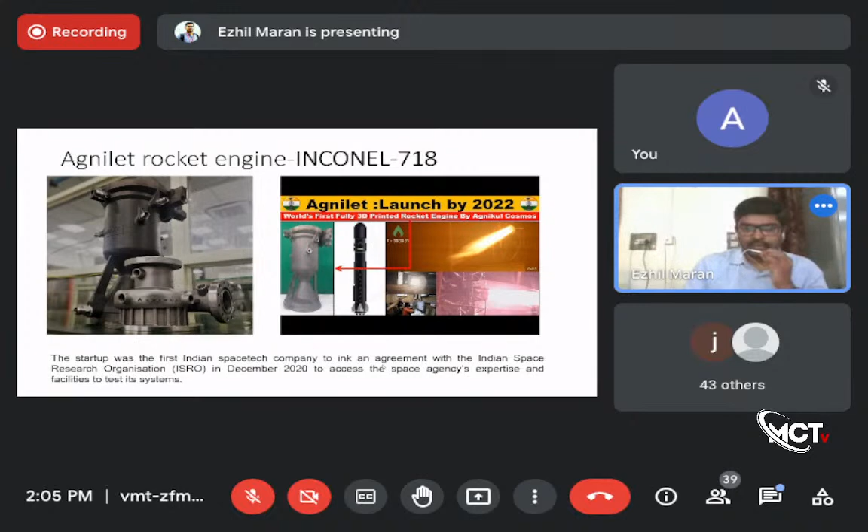So that Agnikul company has raised a total funding of around 35 million US dollars from various agencies. Specifically, Anand Mahindra of Mahindra and Mahindra has also given some funding to develop such a single piece rocket engine. So similar to this startup Agnikul, many such startup companies are coming forward to develop products specifically by using the additive manufacturing process. Around 53 space tech startups in India have collectively raised funding of $220 million.

Because if any one person talks about additive and tries to invest, tries to build something by using additive manufacturing, many investors are coming forward to support, in terms of monetary support or ethical support, whatever it is. Many companies are now giving money to get a better, complex shaped product in additive manufacturing. That is the encouragement. So key goals of India's 3D printing policy are to establish India as a global hub for additive manufacturing, and to develop and safeguard India's additive manufacturing intellectual property.

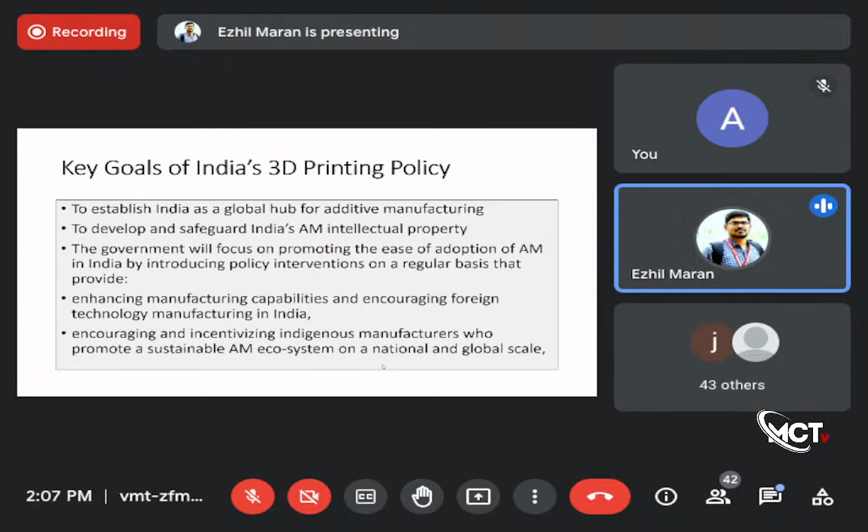Sorry, I'm getting some message. I'm not able to see the message. What exactly is it?

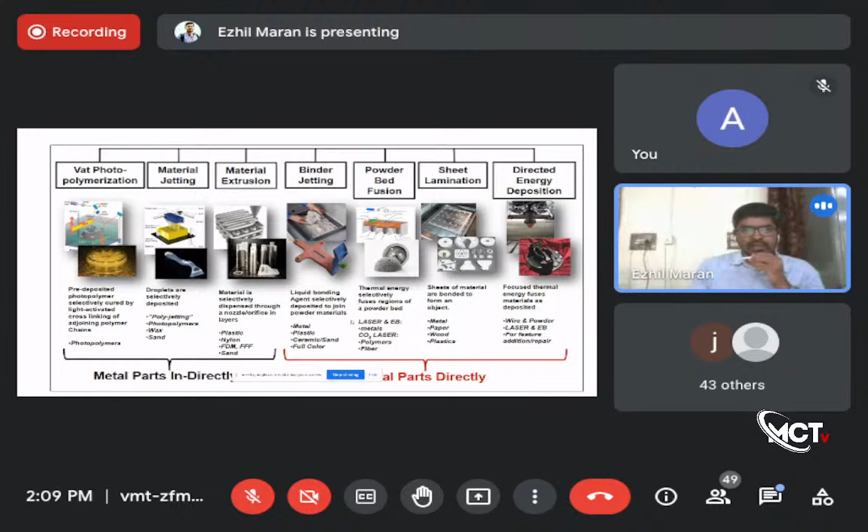Binder jetting is also used to make metals, but it is not covered in this topic. Vat photopolymerization is used to make plastic parts. Similarly, FDM is also used to make plastic parts. That process is not covered in this topic.

So for making metals, primarily two processes are very popular, as I said: powder bed fusion and directed energy deposition. Within powder bed fusion, there are a lot of types: selective laser sintering, which we call SLS, selective laser melting, direct metal laser sintering, and the second is electron beam source.

The first three, SLS, SLM, and DMLS, utilize a laser source. And the second one is electron beam source. You can use an electron beam to melt metallic powders. This process is suitable only for electrically conducting metals.

Selective laser sintering was introduced by the University of Texas at Austin, USA, in the 1980s. Gradually, many people started using it, and they got a patent as well. So others switched over to some other process. The Fraunhofer Institute in Germany, in 1995, because of this patent issue, didn't use selective laser sintering. They invented a new technique called selective laser melting.

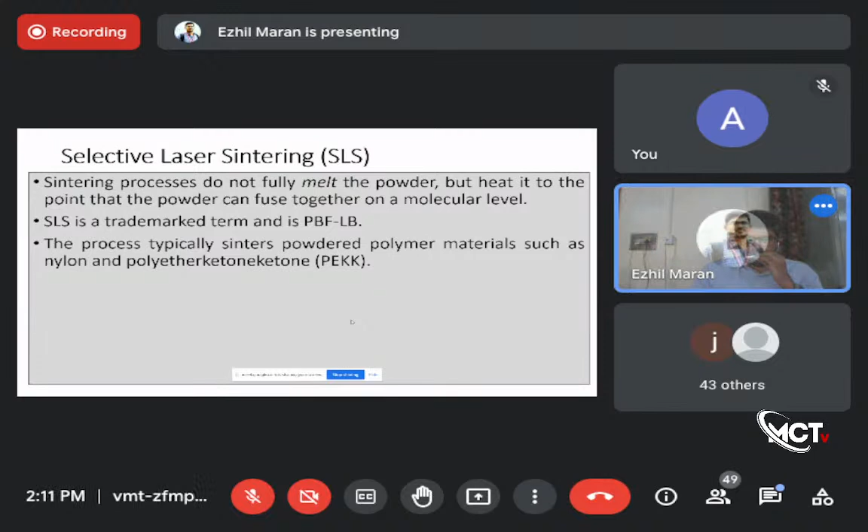But selective laser sintering and selective laser melting both work by almost the same mechanism. There's no drastic difference between SLS and SLM. Selective laser sintering, SLS, does not fully melt the powder, but heats it to a point where the powder can fuse. Only the outermost layer of the powder will be melted, and two powder particles will be fused together at a molecular level. That is called selective laser sintering.

In selective laser melting, the powders will be melted fully. Normally the laser energy is very high, so as to take the powder to melting point, and the fusion of two powder particles is possible. So full melting is possible in selective laser melting. But generally speaking, all the powders will undergo melting. Even if you say selective laser sintering, most of the time the powder will melt.

Sometimes some materials cannot be processed in a normal working atmosphere, so you have to give a separate working ambience. You have to supply argon gas, or use a vacuum atmosphere for certain materials if you want to stop the reactivity of the metallic powder with atmospheric gases. So that is also there.

And one more term is direct metal laser sintering. This is similar to SLS and SLM. This term was coined by EOS GmbH, a German additive manufacturing company. Instead of calling this process SLM or SLS, they coined a new term, DMLS, direct metal laser sintering.

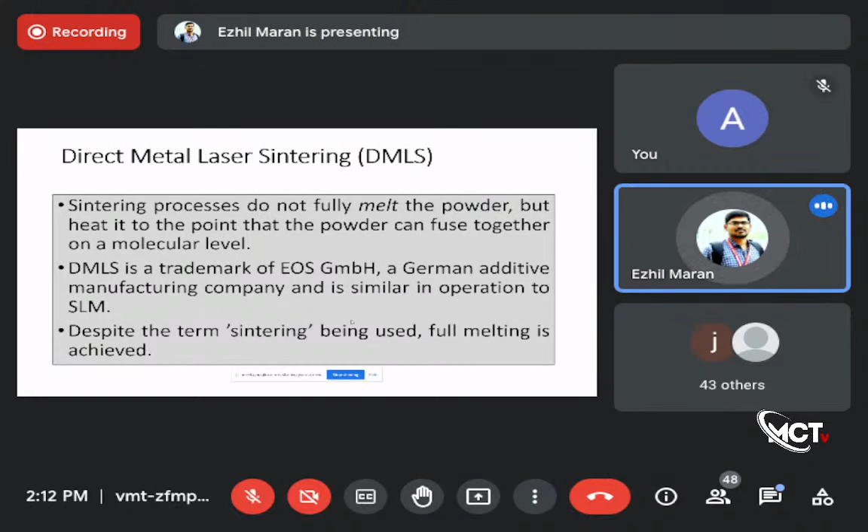But generally, what is SLS and what is SLM? When to use SLS, when to use SLM, and when to use DMLS, if you ask me: if you are working with some sort of alloy, you can call the process SLS or DMLS. If you are working with a pure metal, such as titanium or pure nickel, you have to use SLM, selective laser melting.

Most of the time, we work with an alloy, isn't it? If you work with titanium, you are working with Ti64. If you want to work with nickel, you use Inconel 718. These kinds of materials are alloys. So the majority of the time we use SLS instead of SLM. Selective laser sintering is the widely accepted term.

So the challenges in additive manufacturing: there are a lot of challenges, technical capability, financial, design, IT integration. There are a lot of challenges in establishing additive manufacturing in the global market. Almost all the companies are facing these challenges. So I will explain challenges related to technical and financial design. Capability and IT integration are not covered in this presentation.

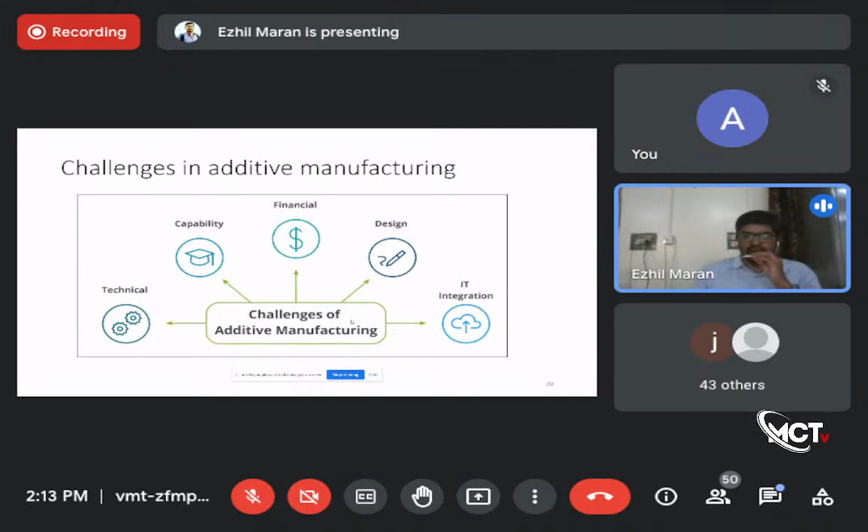Over the plate, the powder is selectively fused by using laser, or it may be an electron beam source also. Once the layer is coated, the powder bed is dropped down by one layer. The next layer is coated over the previously formed part surface by means of recoater plates, and a fresh layer is again fused by means of laser or electron beam. This is called powder bed fusion process.

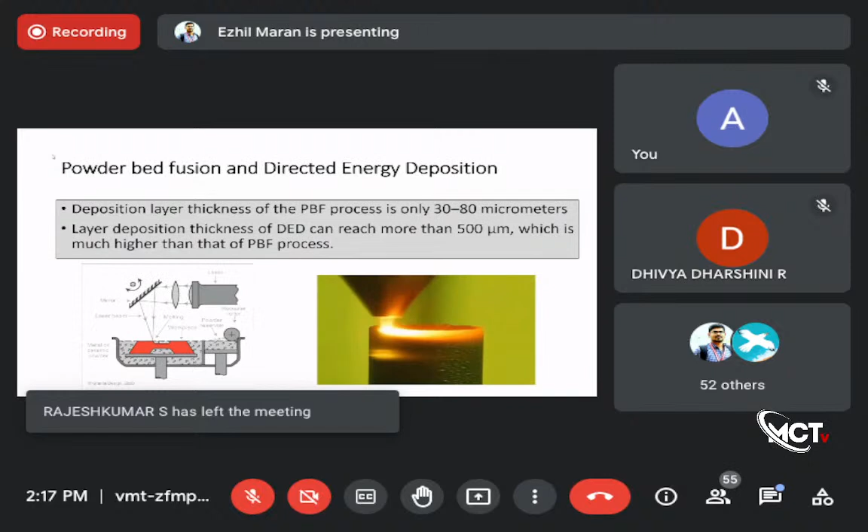The size of the part you are building depends upon the size of the chamber. The chamber may not be big enough to make a big product. So the first limitation of powder bed fusion is part size. But in directed energy deposition there is no such limitation. You can make a very big product in a short time. Deposition rate is very high in directed energy deposition.

Simply saying, directed energy deposition is primarily used for repair work. Suppose in a spur gear one or two teeth are broken; instead of the broken teeth you can deposit fresh material and make it a fresh gear instead of replacing it with another gear. You can make the teeth using directed energy deposition. That is the advantage of DED.

But DED has a lot of disadvantages in terms of accuracy. The product made by DED may not be accurate. Dimensional inaccuracies, that is the term used. And also part strength may not be as high as that of SLM.

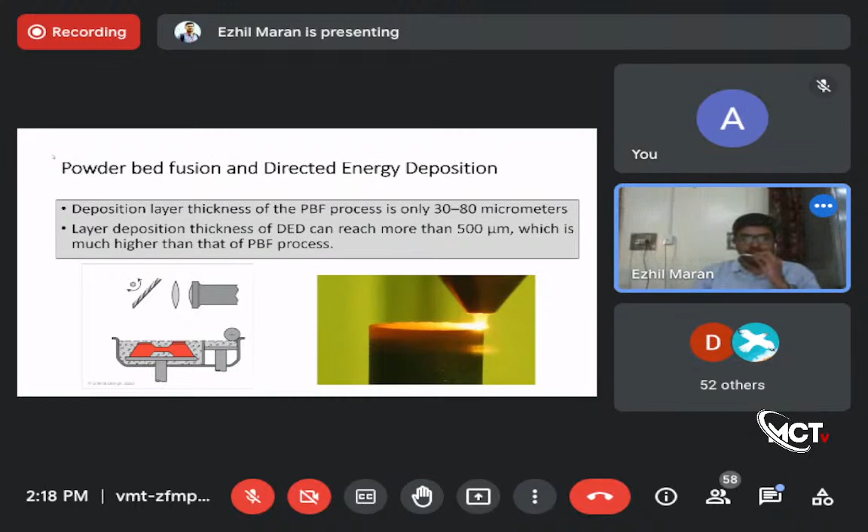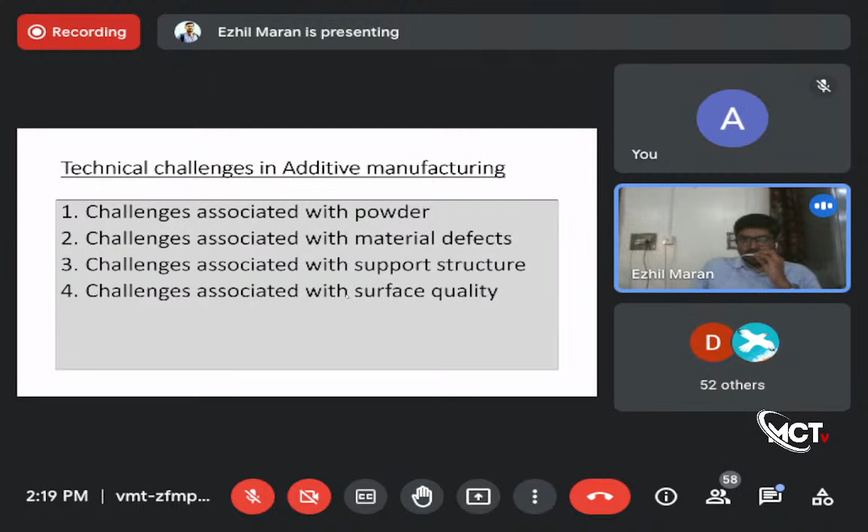So there are three design challenges: anisotropy, wall thickness, and print orientation. And the technical challenges I'm going to cover are challenges associated with powder, with material defects, with support structure, and with surface quality. So what is anisotropy?

Look at the picture. There are two parts printed in different orientations. The first part, a hollow cylinder, is printed vertically, and the second part is printed horizontally. Which one is preferable? Both these parts will be anisotropic. Anisotropic means the properties will be different in different directions.

In the first part, which is kept vertical, the strength is very low in the Z direction. If you apply load in the Z direction, the part will fail easily because this is a layer by layer deposition process and the layer to layer strength is very low. If you apply loads in that direction, the part will fail.

But if you focus more on the aesthetic look of the product, the first part is pretty good. It looks very good, isn't it? So if you don't worry about the strength, the first picture, which is printed vertically, is the correct option. That's the correct way to print.

In the second picture, the same hollow cylinder is printed horizontally. Here it can withstand the load if the load is applied along the axis of the hole, because the layers are printed in a direction perpendicular to the load acting direction. So the horizontally printed object certainly will have huge strength when compared to the first part.

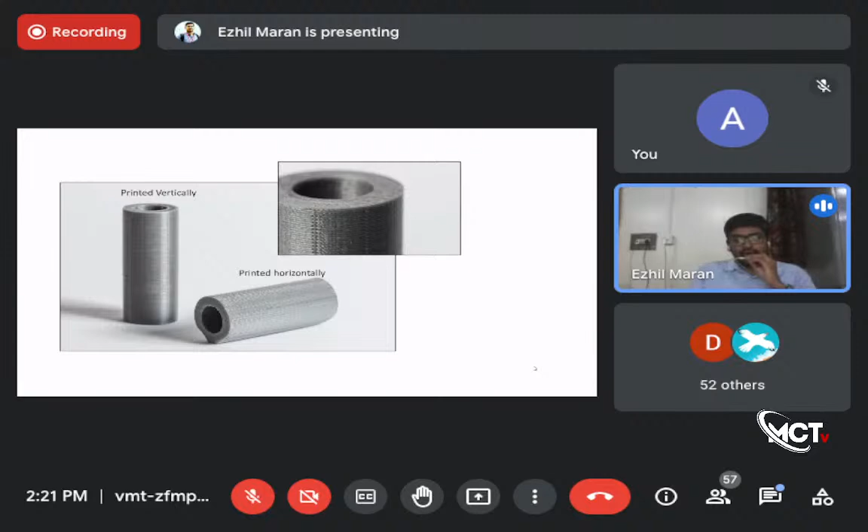So in both cases, the parts printed are not isotropic. Both are anisotropic. Strength is not uniform in all directions. So proper orientation is essential for printing a product. Whether you want an aesthetic look, strength, or to minimize the support structure, these are the parameters which decide which orientation is suitable for printing.

Look at the picture. Which is the best way to print for testing using a UTM, universal testing machine? After printing the shape, to use the UTM machine to test the tensile strength, which is the proper orientation? The object is kept at 0 degree, 30, 45, 60, 90.

So again, the printing direction depends upon the load acting. If you print an object at 0 and the load acting direction is vertical, that is a bad idea. You should not do that. The object which is kept flat, 90 degree, is the best way to print if the load acting direction is along the axis of this standard specimen. If you print it by keeping the object lying down, that's the best way to print.

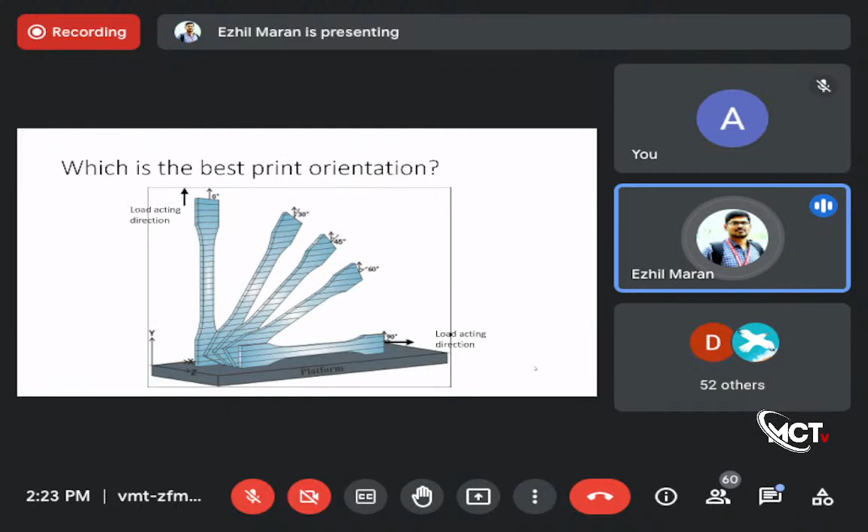If you print at 60 degree, 45 degree, and 30 degree, you need a lot of support structure. The first object is printed in the Z direction and the second object is printed in the XY direction. The force acting direction is horizontal. So what is the best way to print, the first one or the second one? Obviously, the second one will withstand. The first one certainly will not withstand a large amount of load.

A challenge for any manufacturer is the minimum size of hole that can be made in a material. You can make a small hole, say, for example, 100 micron, by using smaller drill bits. 100 micron drill bits are available in the market. You can make a small hole or small slot with the size of 100 micron. Even 15 micron is also possible. But for additive manufacturing machines, that's a little challenge.

The smallest hole that can be made by additive manufacturing depends upon the thickness of the material. In the first picture, the thickness of the material is 2 mm, and in that material you are going to make slots. In the second part, the thickness of the material is 4 mm, and gradually 6, 8, and 10 mm. 2, 4, 6, 8, 10 are the thicknesses of the material, and over that material some slots are made.

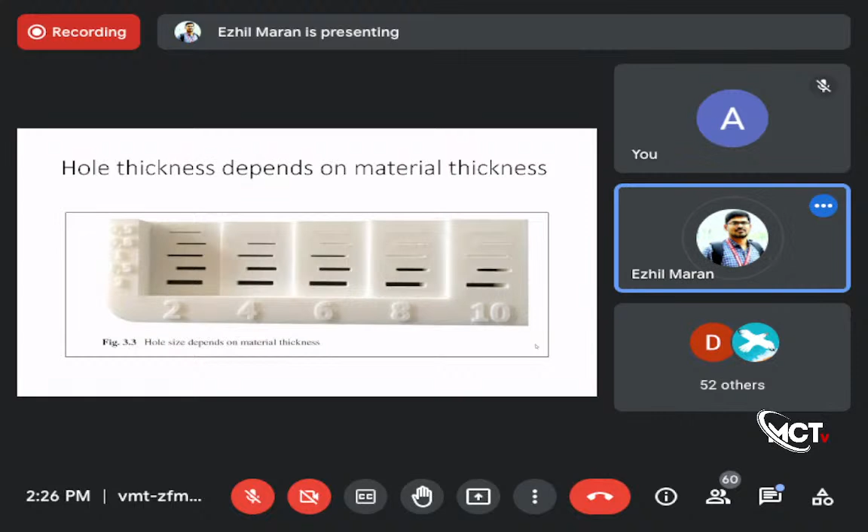Come to the first one, 2 mm thickness. Almost all the 5 slots are clearly visible, isn't it? So the features you are going to make in any material depend upon the thickness of the material, whether you can make very small features.

Print orientation. Look at the picture. Will you print the chair shown on the left side, or the chair shown in the right side figure? Which is the best way to print? Right side figure, sir. Why? Because we can avoid the support structures, sir.

If we go for the first one, we need support structures, so there will be a lot of losses. Yes, absolutely. That's the correct answer. In the first picture, you need a lot of support structure. That is an overhanging shape, isn't it?

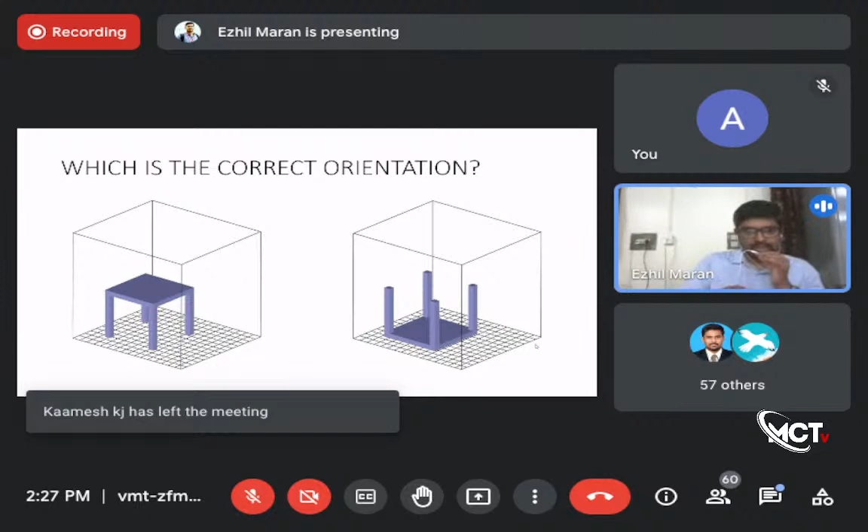The second picture, there's no need for support structure. But there is one more problem in the second picture. How will you remove the part from the build plate? You have to cut it by using some other process, isn't it? You have to use wire EDM or some other process. So that removal is a little bit difficult. Removing the part from the build plate is difficult. So you have to keep it in mind.

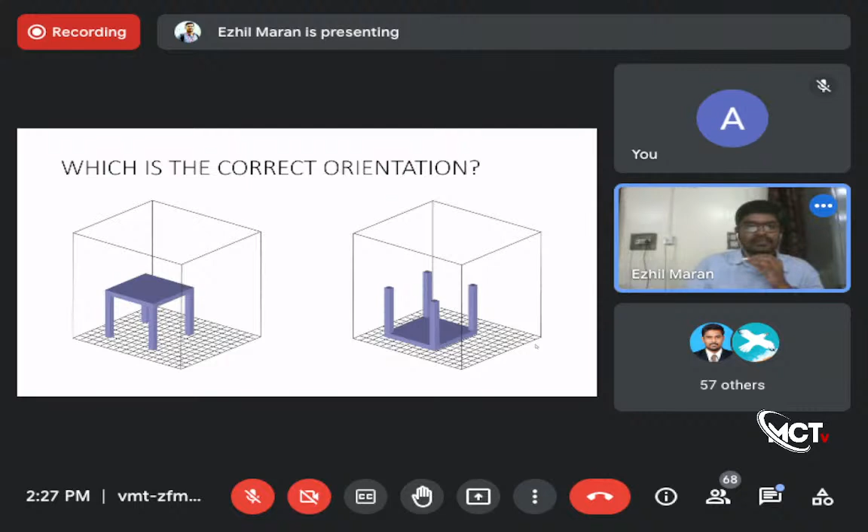So what are the challenges associated with the powder? When you think of any project in additive manufacturing, this is the first step for any manufacturer, any business person, any academician. They have to buy the powders. Metallic powder; if you want to use plastic, you have to purchase plastic powder or form pellets. Any manufacturer has to start with these powders. The quality of the part depends upon the quality of the powders you are purchasing.

So what are the issues with powder handling? There are a lot of issues: reactivity, flowability issues, airborne particles, agglomeration of the powder. These are the main issues while purchasing the powder. Some powders are very highly reactive. For example, magnesium is very highly reactive in powder form. Even if magnesium powder is exposed to the atmospheric environment, it will react. That's a danger of fire hazard. And aluminum powder is highly reactive. So some powders are highly reactive in nature.

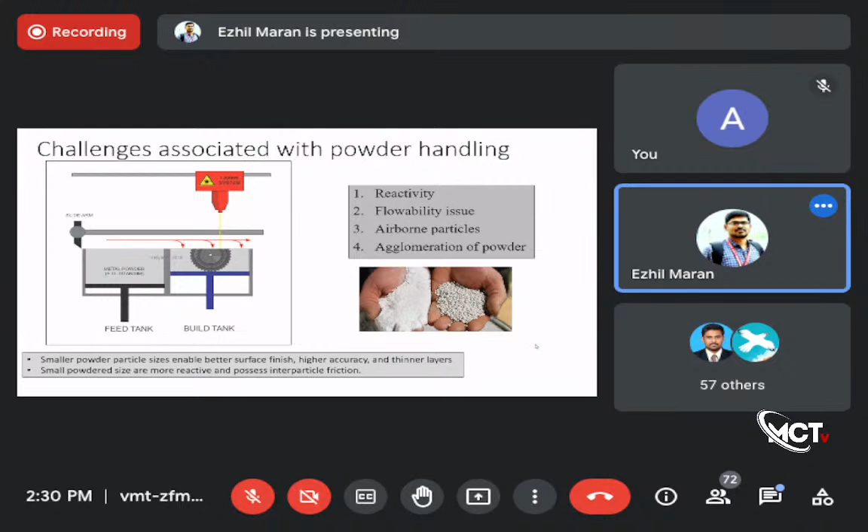So the ultimate point is to purchase powders from a reliable, quality supplier. If, simply because of economical reasons, you purchase powder from a supplier that is not very genuine, you will end up in trouble. There are a lot of ways to make powder: atomization, mechanical crushing, chemical reduction. Popular processes are atomization, such as water atomization and gas atomization. Water atomization is not suitable for material with affinity towards water, so most of the time, gas atomization is recommended.

After purchasing the powder, if you look at it, you see micro-sized, uniform spherical shaped powder with different ranges of sizes. Smaller particles will occupy the gaps between the bigger particles, so the density of the product will be very good and porosity will be minimized. That is also an aspect while purchasing the powder. Irregular powder shapes, such as elongated particles, should be avoided. You have to carefully verify whether irregular particles are present or not.

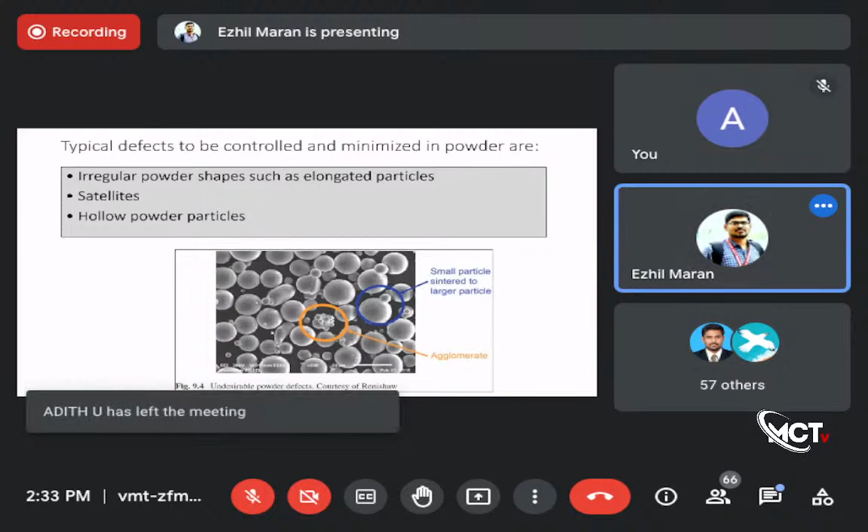So I said there is a powder size distribution. Generally, the powder size will be less than 100 micrometers, which is recommended so as to improve the density of the part. A larger powder size is not generally recommended. The powder size should not be more than the thickness of your layer. That is a general rule.

So this is the layer by layer additive manufacturing process, so your powder size should be less than your layer thickness. Suppose you are making a 100 micrometer thick layer; your powder size should be at most 1/3 of the layer thickness. You can purchase a powder size of 30 to 40 microns. That is good enough.

So there are other powder considerations also, because the powder bed fusion process is not an economical process. When you make some products, you have to reuse the powders again and again to prevent wastage. If you are reusing it again and again, the powder quality at some point will not be good. It will acquire atmospheric oxygen again, and some other issues will arise because of repeated recycling.

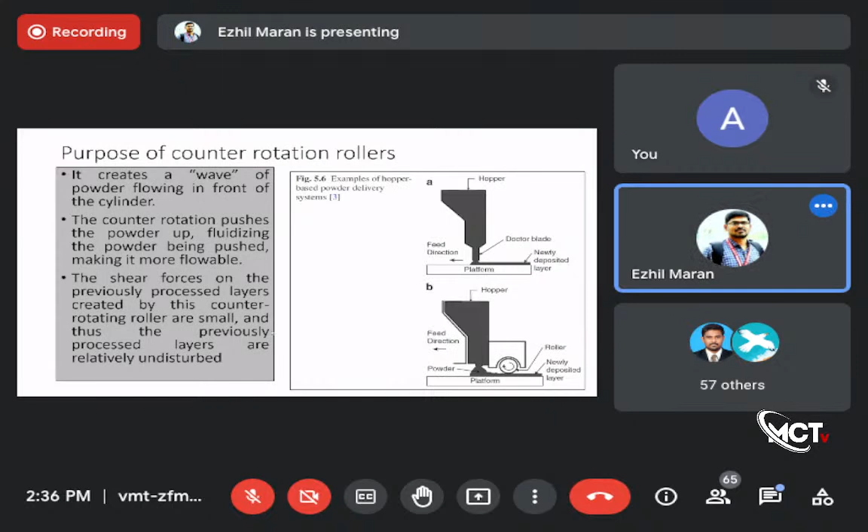This roller rotates in the opposite direction to the direction of the feed, so it distributes the layer very uniformly. That is why the second picture is widely used. There are small things manufacturers are focusing on to improve the quality of the product. One such small thing is that instead of the Doctor Blade, rollers are used to distribute the layers.

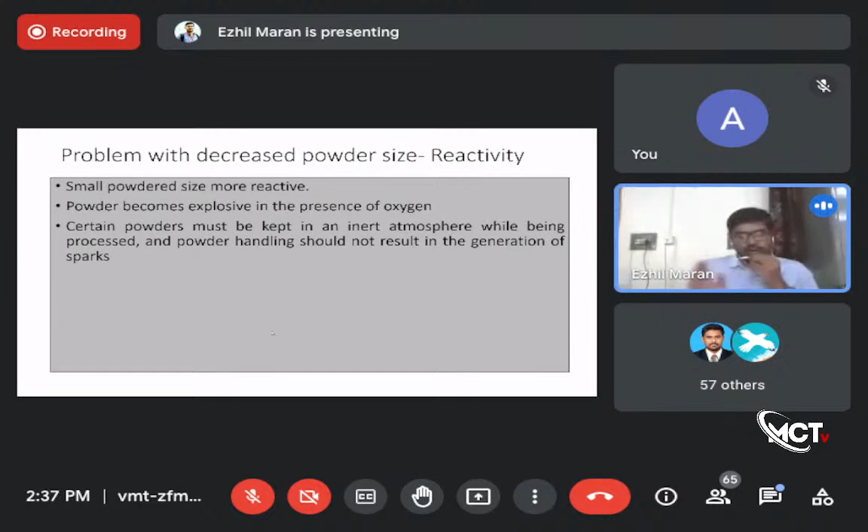And one more thing, the powder size should be very, very small. For any additive manufacturing process to be successful, the powder size should be small. That is a requirement. The smaller the powder size, the higher the density and the lower the porosity. The powder size is closely related to all those quality terms. But where the issue comes is reactivity. Small powders are more reactive. As I said, magnesium is highly reactive. You can't go for smaller size powders.

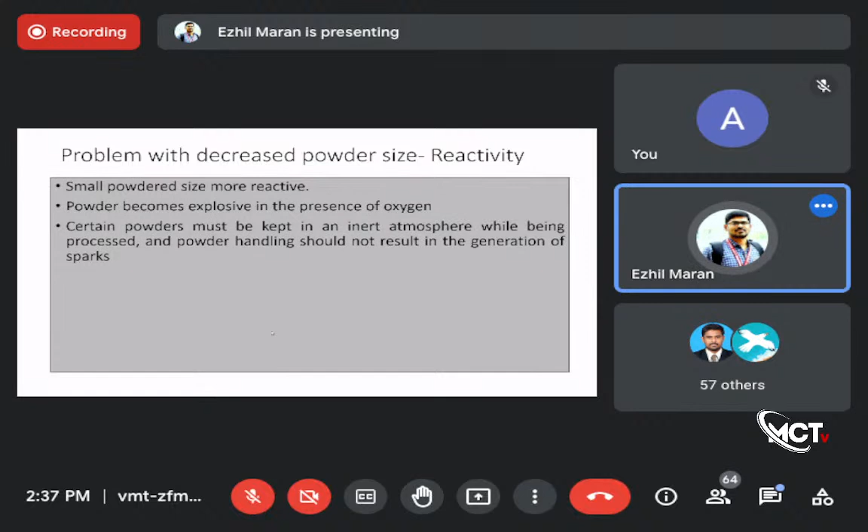There are many other issues with smaller size powder. Even though it is very beneficial for making a final product, there are many other issues with decreased powder size. Also, when the laser or an electron beam falls on the powder bed, what will happen? The powder will splash. It will stick to the adjoining areas. It will stick to the optics also. There are many optics used with lasers.

It will stick to the optics because the laser has to be focused, and for focusing the laser you need optics. It will stick to the nearby areas, and sometimes it will deflect the laser beams also. These kinds of quality issues come when you use smaller powder particles. But there are other advantages as well with decreased powder size, like better surface finish, high accuracy, and thinner layers.

So you have to decide which powder particles to use and what issues you accept. As a manufacturer, you have to decide. The recommended powder size for PBF, which stands for powder bed fusion technology, ranges from 20 to 40 micrometers, whereas for DED it is 45 to 150 micrometers. This is the recommended size.

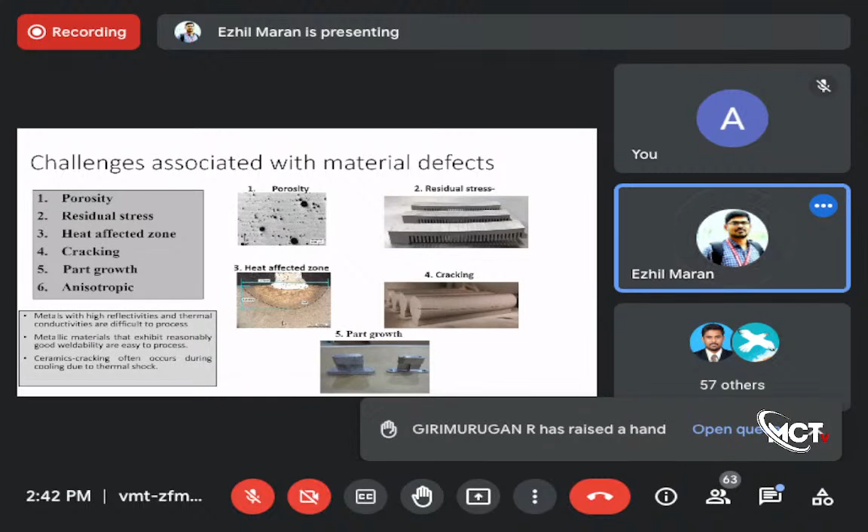And the fourth one is cracking. Because of intense heat and residual stress, cracking may occur. The fifth one is part growth. The part will grow in size. I will explain what is meant by part growth later.

So a 100% dense product is not always possible by using additive manufacturing. It may not be 100% dense. Maybe 90% density can be attained even with the proper processing parameters. Otherwise, 100% density may not be attained.

So how to minimize the porosity of the part during printing, or after the part is printed? There are two ways. One is during printing, it is possible to minimize the porosity. The part is held at elevated temperature after scanning. That is the way to control porosity during processing. Carefully controlling the powder bed temperature, cooling rate, and other parameters. You have to carefully control all the laser related parameters to minimize the porosity.

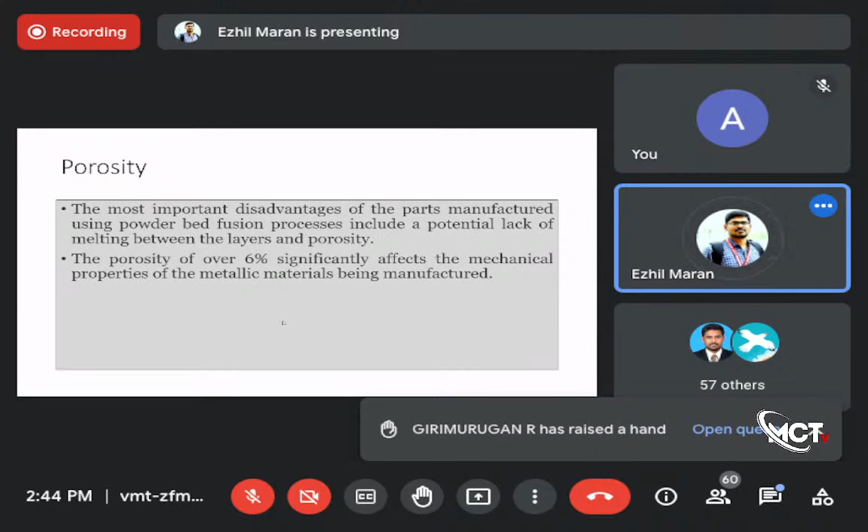And the second most important is residual stresses.

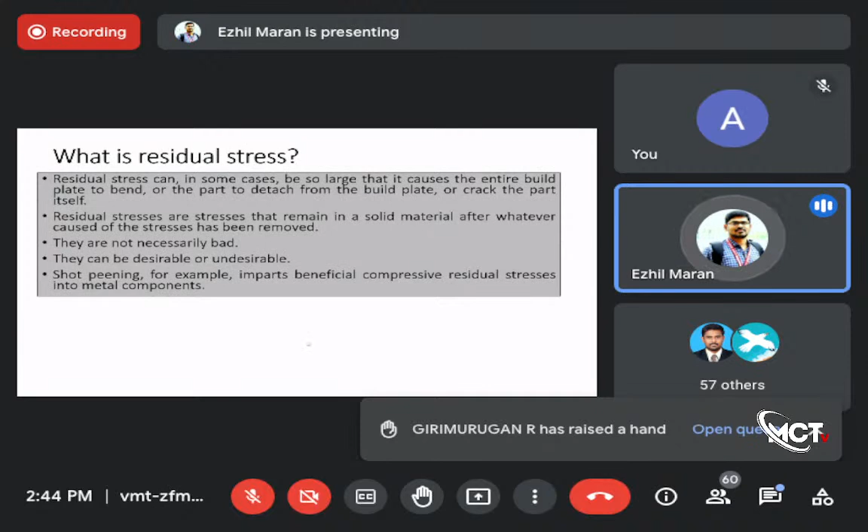Wait a minute, my slide is not changing.

Okay, why are residual stresses formed in the material? It is a thermal process, and a layer-by-layer additive manufacturing process. When a new layer is deposited, what will happen? It tries to expand, and gradually that new layer will be cooled. So now one more fresh layer is again coated on the already formed layer, which is now a contracting layer, because the previous layer is now getting cooled.

The size of the previously deposited layer is now reducing because of contraction. So over that contracted layer, we are now depositing a fresh layer of metal. Because of this expansion and contraction, the fresh layer tries to expand, but the already formed layer behind it tries to contract. This difference in expansion and contraction will create residual stresses.

Even though it is not possible to avoid it 100%, it is possible to minimize the residual stresses by some suitable ways. So, what are the ways? Let's see the ways to minimize the residual stresses. Generally, a part has tensile residual stress on the outermost layer and compressive residual stress on the inner layer. This compressive residual stress is almost always helpful. Compressive residual stresses increase the fatigue life of the component.

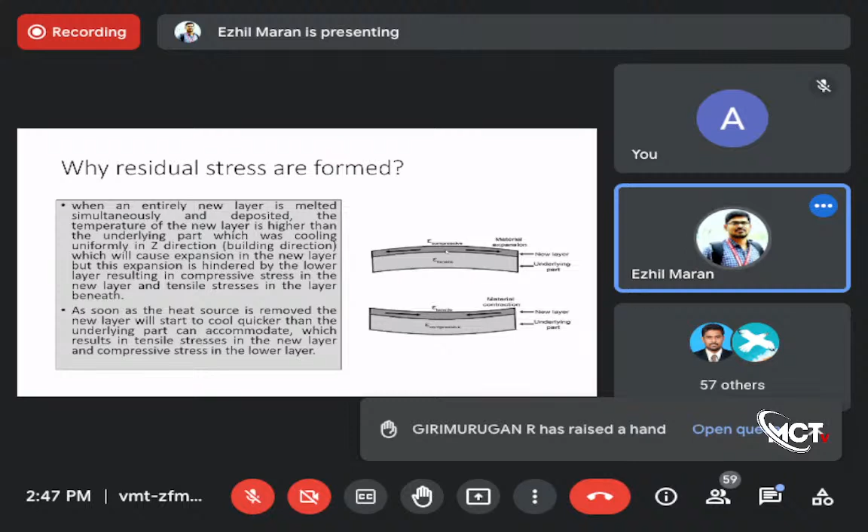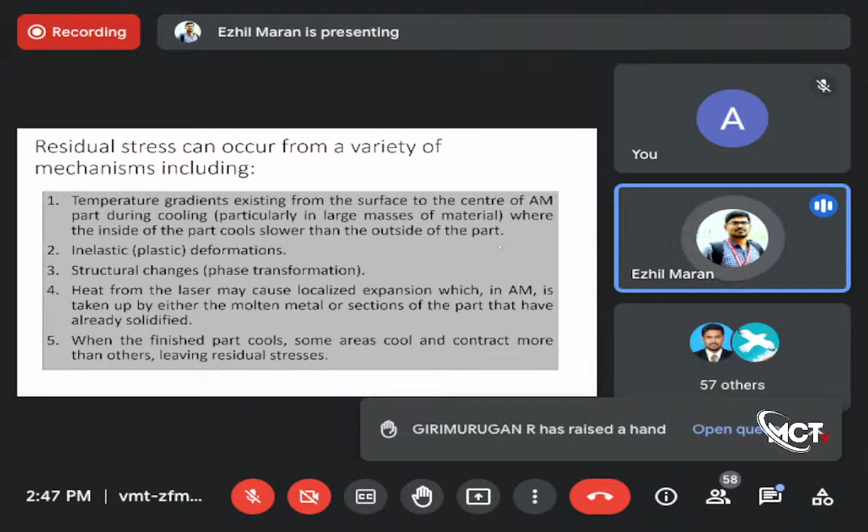Residual stresses occur from a variety of mechanisms, mainly because of temperature gradients, the difference of temperature at different regions. There are many other hypotheses also: inelastic deformation, structural changes, phase transformation, heat from the laser, etc. There are many other reasons, but how to avoid it? There are many ways. During the designing stage itself, we can reduce it.

We have to design a product in such a way that the part should contain uniform thickness. The part should not contain any masses. If the part contains masses, there is a large chance of thermal gradient. So that has to be avoided. In the design stage itself, we have to avoid this kind of design-related residual stress problem.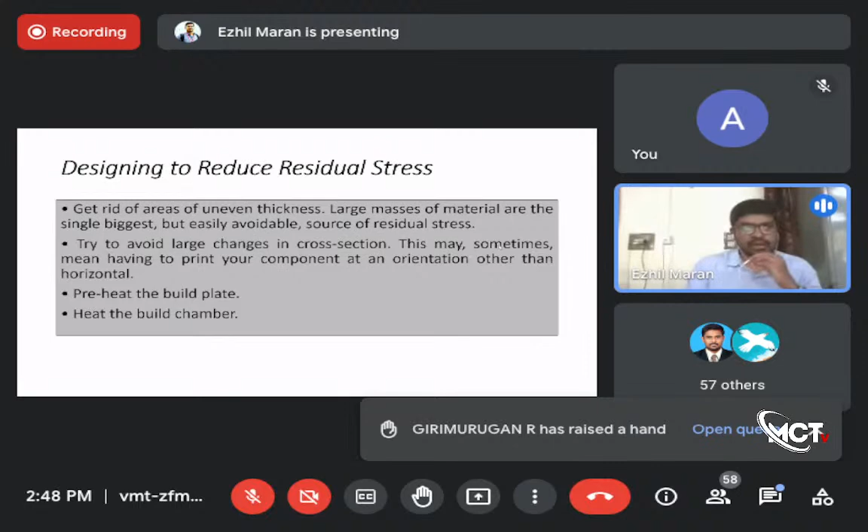And you can preheat the build plate to minimize the residual stress to a certain extent. You have to heat the build plate over which we are going to form the product layer by layer. Other ways, you can heat the overall build chamber to a certain temperature, say, for example, 500 degrees or 600 degrees, to minimize this kind of residual stress issue.

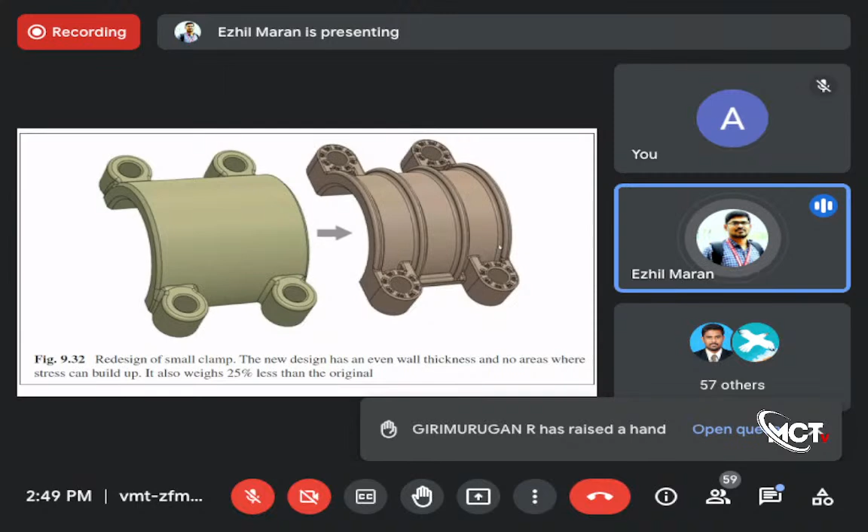This is the picture taken from the book. The first picture contains a lot of masses. In the second picture, all the masses are reduced. The thicknesses are uniform. So that way you can minimize the residual stress to a certain extent. This is one way to design. Always try to eliminate uneven thickness. Eliminate the masses. Minimize the residual stresses. That is one way.

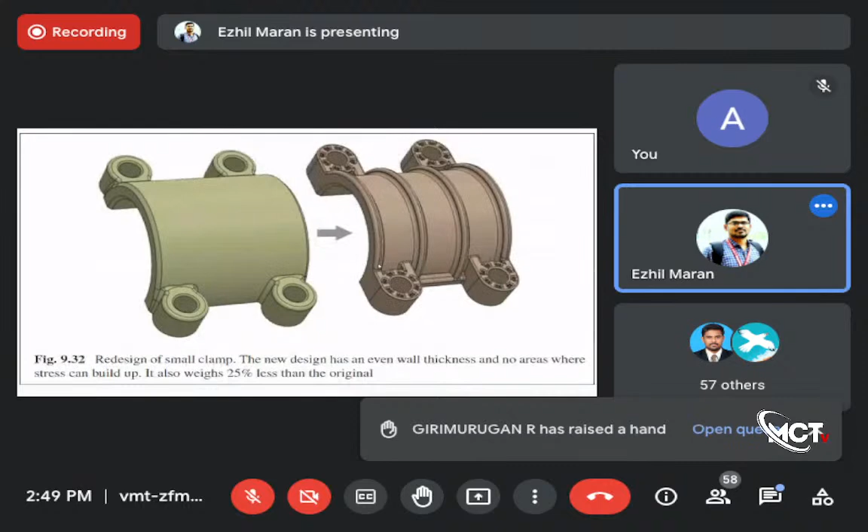And the second design is... Wait a minute. Yes.

Okay. In the first pictures you can see the masses are not evenly distributed. When the part shown in the first picture is printed, it will get a lot of residual stresses. The second picture is recommended because the thickness of all the parts is uniform, all the shapes are uniform. There is no extra material, so you have to design accordingly. That is a design-wise idea to minimize the residual stresses.

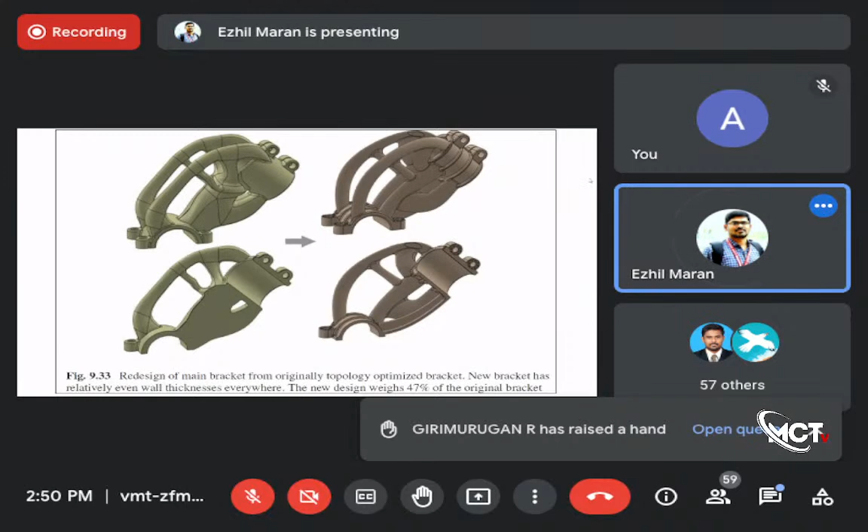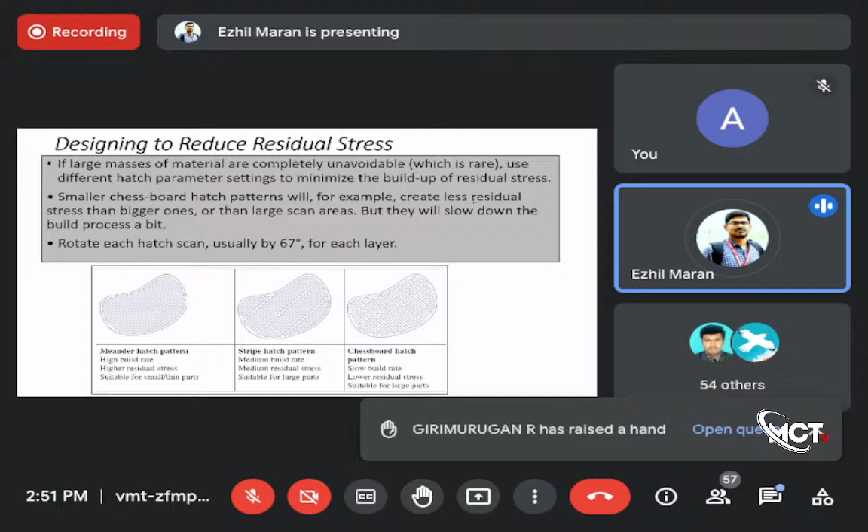Instead of printing in a single go, it is possible to print it in small islands like the chessboard hatch pattern. That pattern will help you reduce the residual stresses. There are a lot of other steps like build chamber preheating, base plate heating, and laser pre-scanning heating. I'll tell you what is meant by laser pre-scanning heating. All these will help to minimize the residual stresses.

So I hope you understand the importance of minimizing residual stresses, because residual stress is detrimental. It will create unnecessary strength-related problems. It affects the fatigue life. If you make a part used for aerospace applications that undergoes cyclic loading, and it contains high residual stresses, your part will fail before it reaches the yield point. So you have to carefully minimize the residual stresses before using it for any application. This laser-related process contains phenomenally high residual stresses.

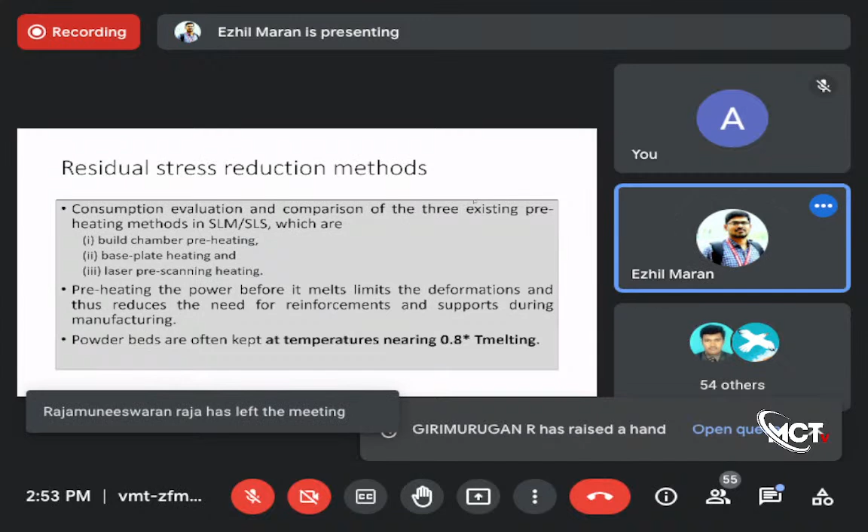So this is the third method to minimize residual stresses. Instead of heating the powder bed directly by using laser, before heating the powder by using laser pulses, you can heat it by using some other process. That's called preheating the laser bed. Okay, you have to preheat by using infrared lamp. Then your laser will heat the part.

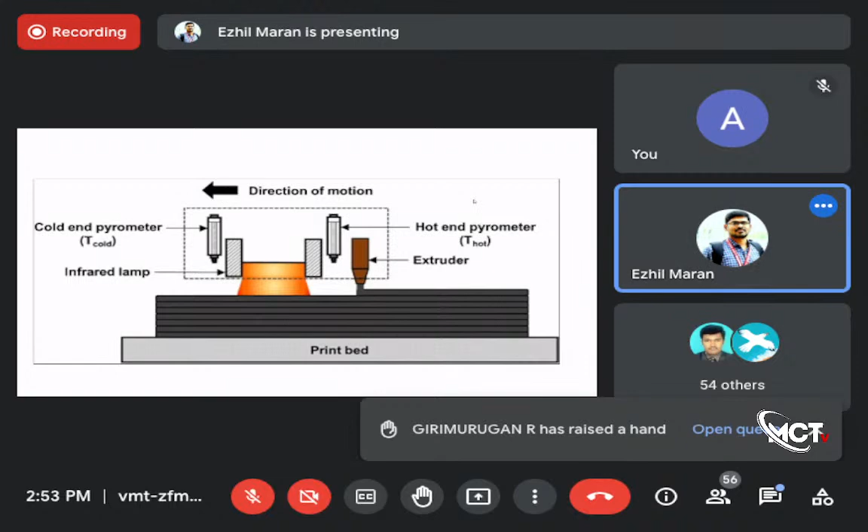So part growth, what is part growth? I'll show you one picture. You can understand what is maybe part growth.

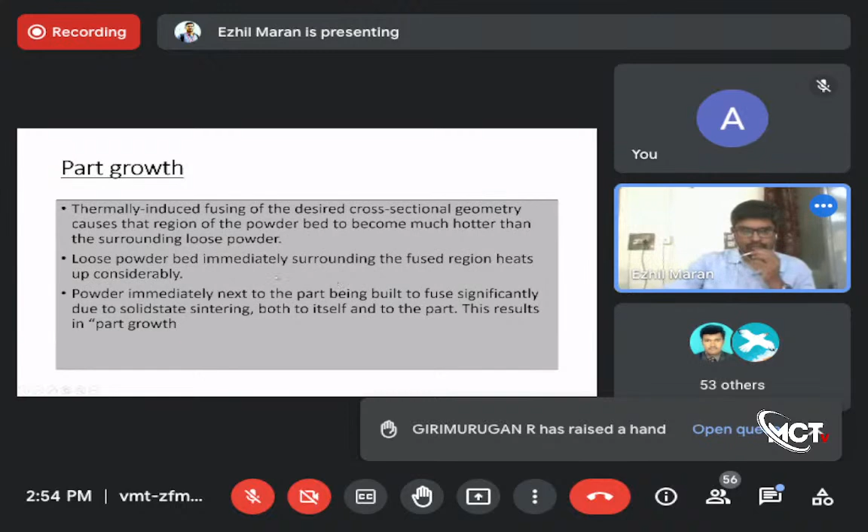So wait. Wait a minute. Yes, sir. The slide is not changing. Okay, no problem. I go to the next slide.

So the part growth arises because of the main reason for part growth is when first on the powder bed, because the laser scanning is based upon the part you have designed by using CAD softwares, and you have converted that part into STL model, and that STL model is replicated as your final part. That is a process. But when the laser falls on the powder based on the STL model, the adjacent particles, which is adjacent to the boundary area of that part, will also get fused, and it sticks to the part.

So that way, the part will grow in size because it acquires powder. The laser beam acquires powder from the adjacent regions, and that powder is melted, and again it sticks to the part. So the part is somewhat bigger in size when compared to your actual CAD model or STL model. Somewhat it is bigger in size. So you can minimize that. Post-processing method you can go for.

You have to go for machining to take it to the original shape, or else you can do some adjustments. You have to make the part very smaller, keeping in mind that the part will be bigger than your STL model. That way, it is beneficial. That's called part growth. So these are the issues.

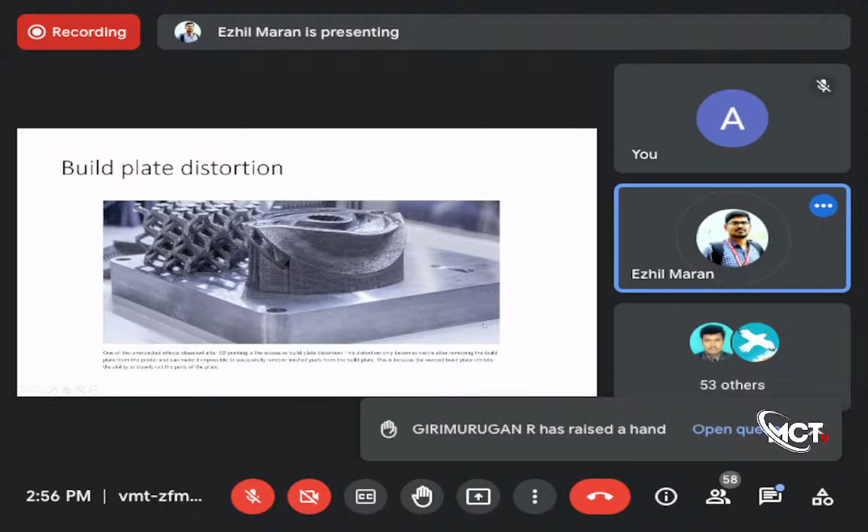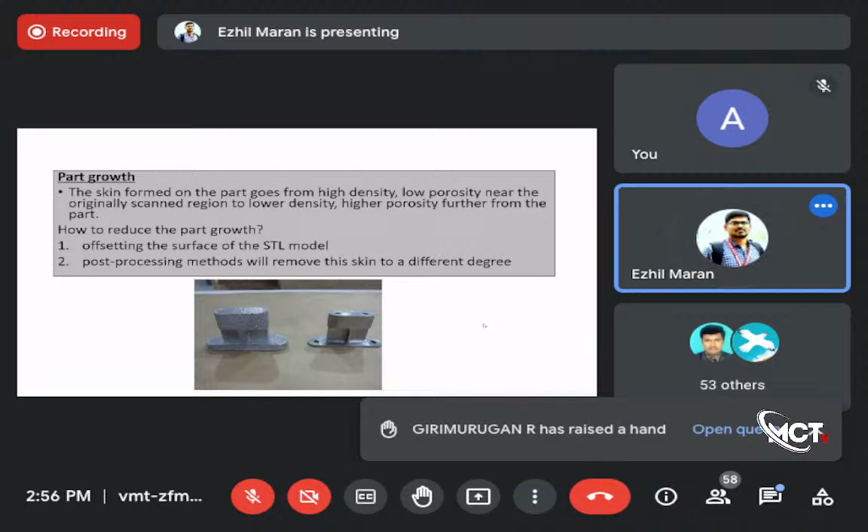So there are many such issues like part growth. It is completed. Yes. So there are a lot of other challenges with material also. Normally, development of an alloy takes a decade. The material cannot be developed just like that because so much hard work is required to develop a material and give it to the market.

So you use plenty of materials like Ti-6Al-4V, Inconel for turbine blade material, etc., but these materials are not developed in a single day. So over a period of time, these materials grow. So like that, additive manufacturing is a new method, isn't it? So you have to carefully examine all the parameters, laser parameters, material parameters, etc., to get a quality product, so that the end user will be satisfied with your product. You have to keep that in mind.

So materials wise, there are a lot of discomforts for additive manufacturing. I'm going to explain one by one. Generally, I plan to speak about problems associated with two materials. One is magnesium, and second one is tungsten. There are a lot of issues with other materials also. Nickel, titanium, stainless steel. So these are the materials that can be printed by using additive manufacturing machines. So I'm going to focus only on the issues with materials such as magnesium and tungsten.

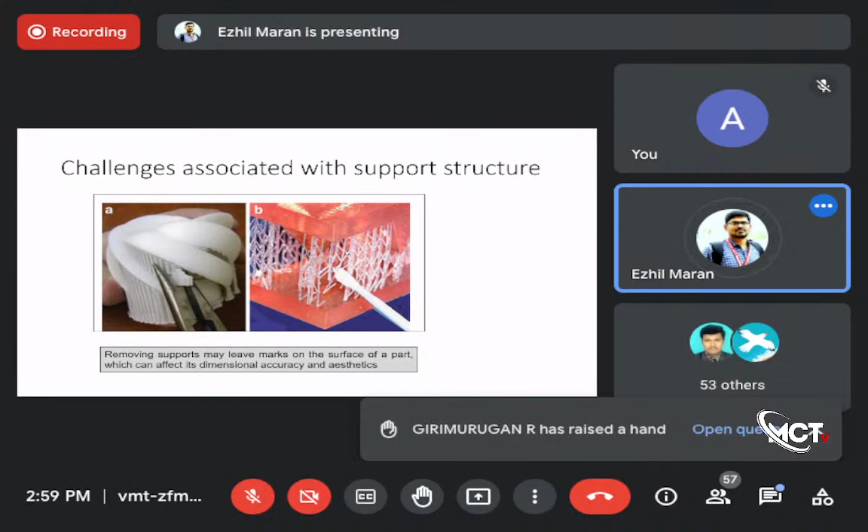And the problem with the laser Gaussian beam. So the laser beam, because laser is used to melt the materials.

So is my slide visible to all of you? Is my slide visible to all of you?

Can anyone please respond? Is the slide visible? Yes, sir. Visible, sir.

So there is some issue with the laser beam also. Laser beam is Gaussian. What is meant by Gaussian? You can see a bell-shaped curve. That is called Gaussian. So when the laser beam falls on the material, the center part of the beam possesses maximum intensity, whereas the outside portion of the beam will not have that much intensity like that of the center. So in the middle part of the beam melting is more, but at the extreme end of the beam melting is very less.

That is the problem with the laser. So the extreme end part may not be completely melted. So a heat affected zone will be formed on the extreme ends of the laser beam. So you have to use an approach while scanning the powder by using the laser beam. You have to overlap the laser beam so as to minimize the heat affected zone. That approach is what is used.

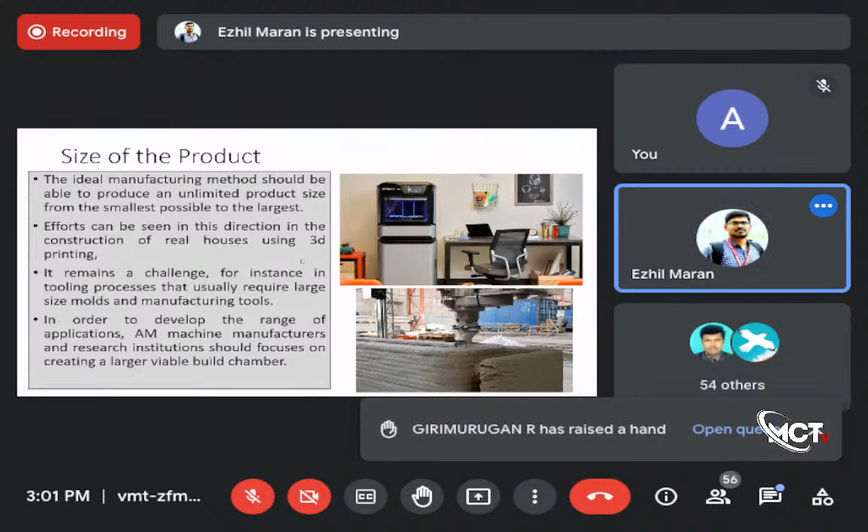When coming to the size of the product, how much size of a part can be produced by using additive manufacturing? It depends upon the manufacturer who built that machine. This is the Arcam's largest build volume: diameter of 350 mm and height of 380 mm. So you can make a product with diameter 350 mm and height 380 mm. That's the maximum size you can make.

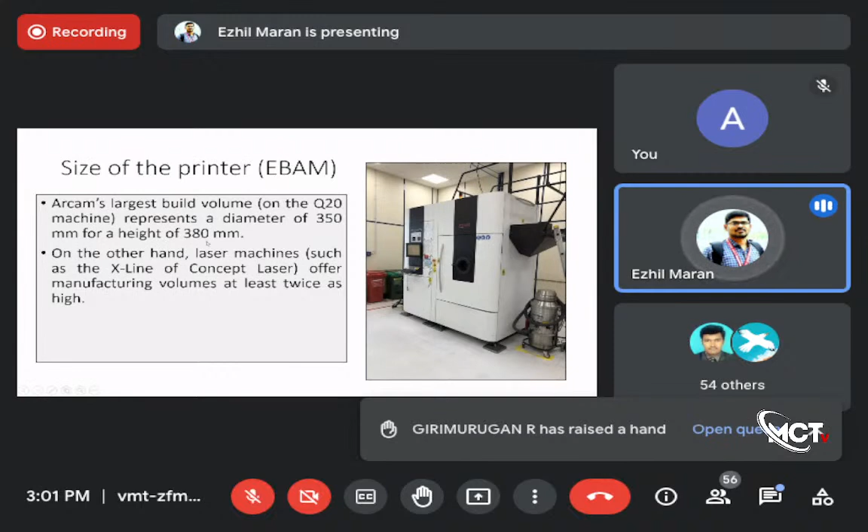But for a 3D printing machine, you cannot get easy access or an easy, user-friendly graphical user interface. That is also an issue. Still now, the 3D printer manufacturers are not able to develop a user-friendly graphical user interface.

It seems that my slide has some issue. It's not changing. Shall I close the slides and come back again? Okay, sir. We'll all wait. Now, are you seeing the slides? Yes, sir. Visible, sir.

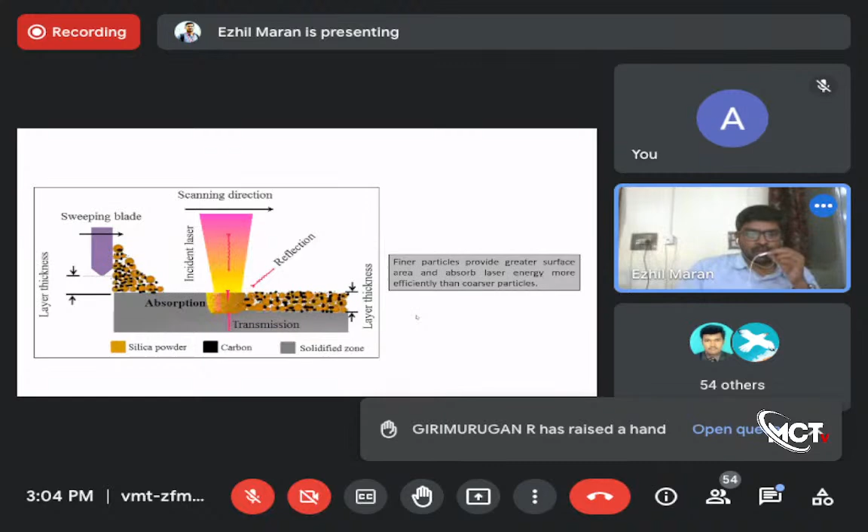So the thing is, at lesser energy, the porosity is very high, but the surface is somewhat smoother. But if you increase the energy, slowly the porosity is reduced, but the surface is rough. So you have to keep in mind what is the appropriate energy you have to use and what is the requirement.

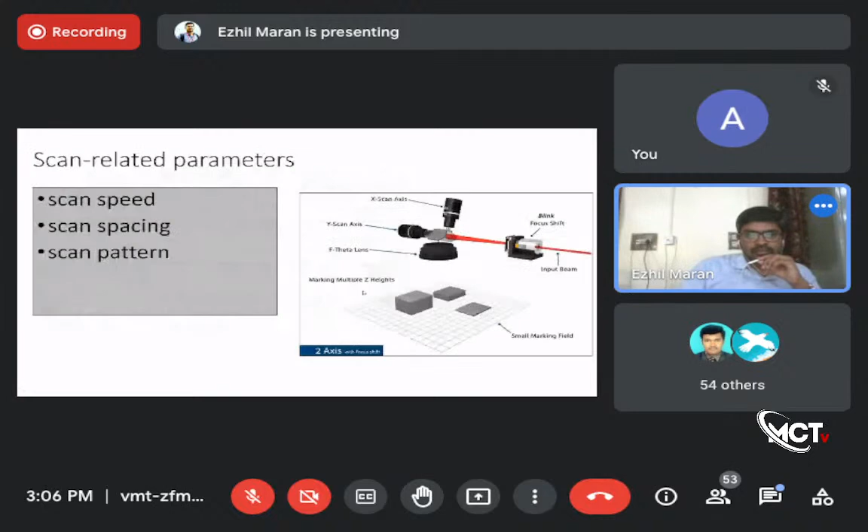So this is the relationship between laser parameters. If you use a high laser power and high bed temperature combination, you can produce dense parts, but part growth, poor recyclability of the powder, and difficulty in cleaning parts occur. There are plus and minus. Producing a dense part is positive. At the same time, part growth, poor recyclability, and difficulty in cleaning parts are the negative side.

If you use low laser power and low bed temperature combinations, you cannot get a dense or structurally sound part. At the same time, better dimensional accuracy is there. Tendency for layer delamination. Delamination means the layer will peel off. Laser power and low part bed temperature combinations: non-uniform buildup of residual stress and curling of parts.

So these are the issues with the laser. So you have to carefully use all the laser parameters. You have to use a design of experiments kind of thing for all the materials which you have to try. So far, some standard design of experiments are available only for limited materials. Say, for example, titanium material. People are trying; the last 10 years, people are trying.

They are using some standard processing parameters for titanium. But if you go for some other materials, unknown exotic materials, there is no proper process setting. Till now, it's not available. Laser process setting is not available, and powder size is not available. Layer thickness has to be decided. So everything matters a lot in improving the quality of the product.

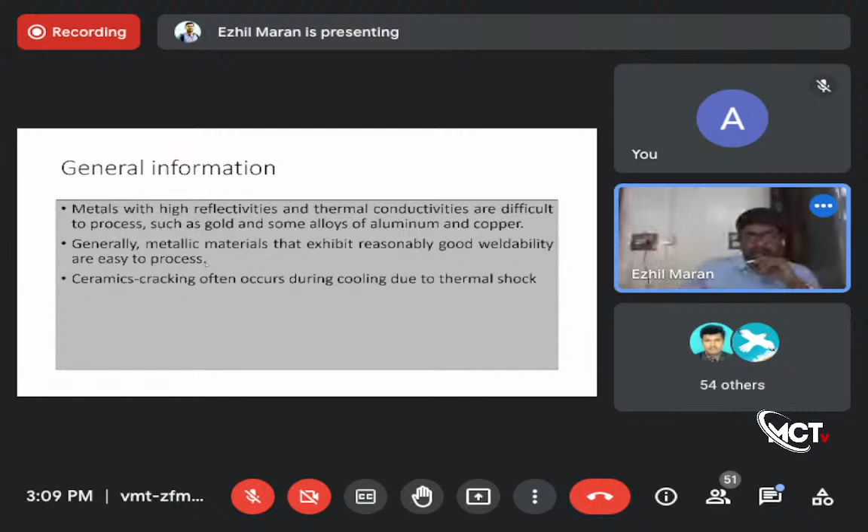So, more specific materials, I plan to touch only two. One is refractory metals. There are some issues with printing refractory metals. Refractory metals refers to tungsten, niobium, tantalum, rhenium, molybdenum. Generally, conventionally, these refractory metals are produced by powder metallurgy because of their high melting point. Tungsten melting point is more than 3000 degrees Celsius. I don't know the exact value, but the melting point of tungsten is very, very high.

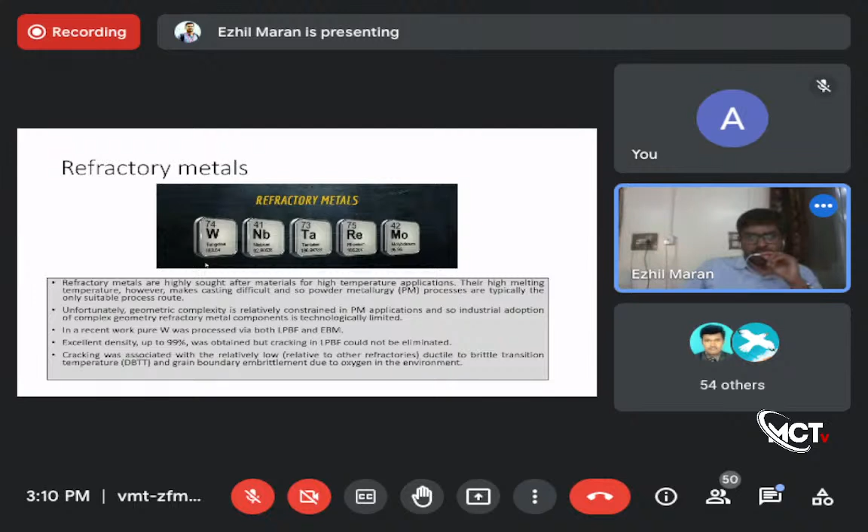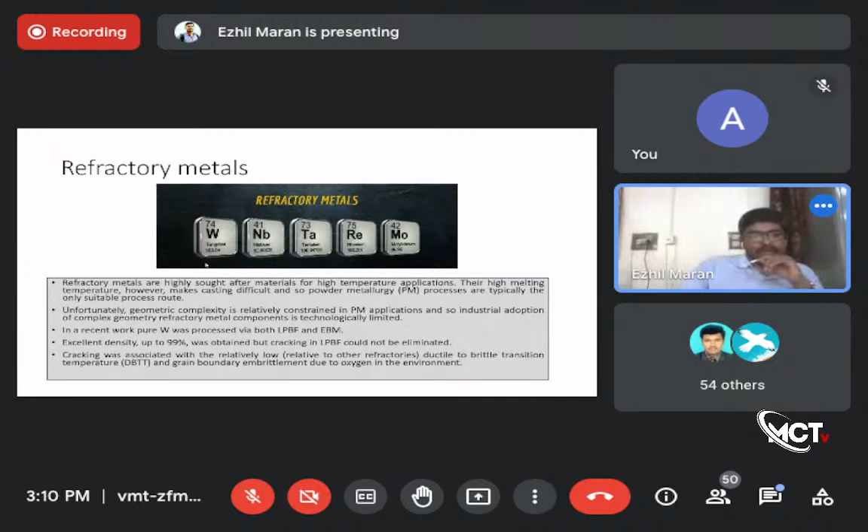You have to use the powder metallurgy technique to make tungsten products, refractory metal. But how to make a complex structure, a desired design structure using tungsten? For that, you need 3D printing. But there are some issues with processing tungsten by additive manufacturing. The main problem is the operating temperature. It has a very high operating temperature.

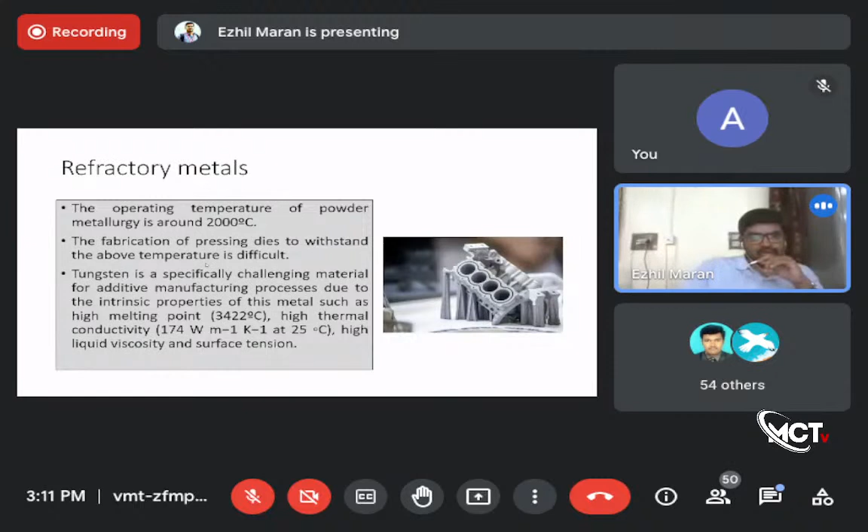Of course, laser can go up to 10,000 or 40,000 degrees Celsius for a short moment. Laser can melt tungsten powder, but that is not the main issue. The main issue is the high thermal conductivity, high liquid viscosity and surface tension. So when tungsten is processed by selective laser melting, the main issue is balling. In that phenomenon, molten liquid ball-like structures are deposited on the layers.

It occurs generally because of the third point. You can read. Balling generally occurs when the melt formed during laser material interaction breaks into small islands. This ball-shaped liquid is deposited on the surface. So when the next layer is coated on this structure which contains balling, layer to layer adhesion may not be proper. That is an issue. The same issue is there in magnesium also.

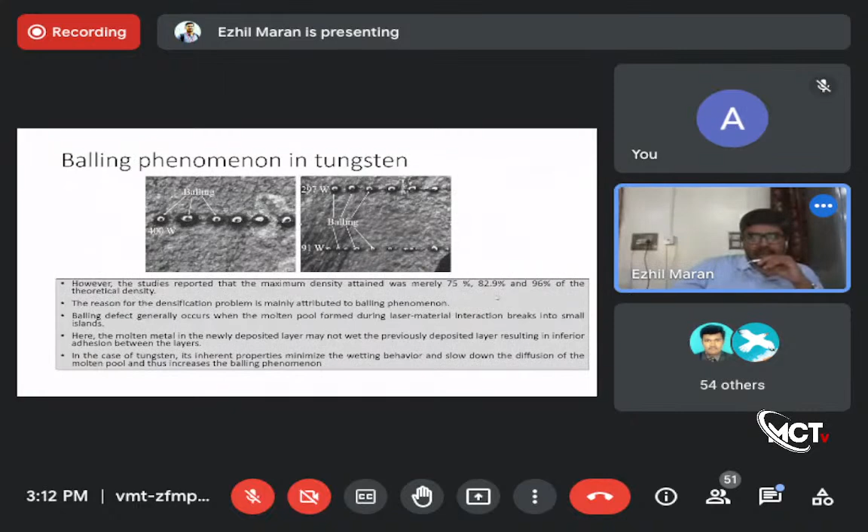And the main issue is it is not possible to attain 100% density. Maximum attainable densities, based on earlier studies, were 75, 82.9, 96%. And the next metal which is difficult to print is magnesium alloys. Magnesium is a lighter material than aluminum. It is used for aerospace applications, biomedical applications, etc.

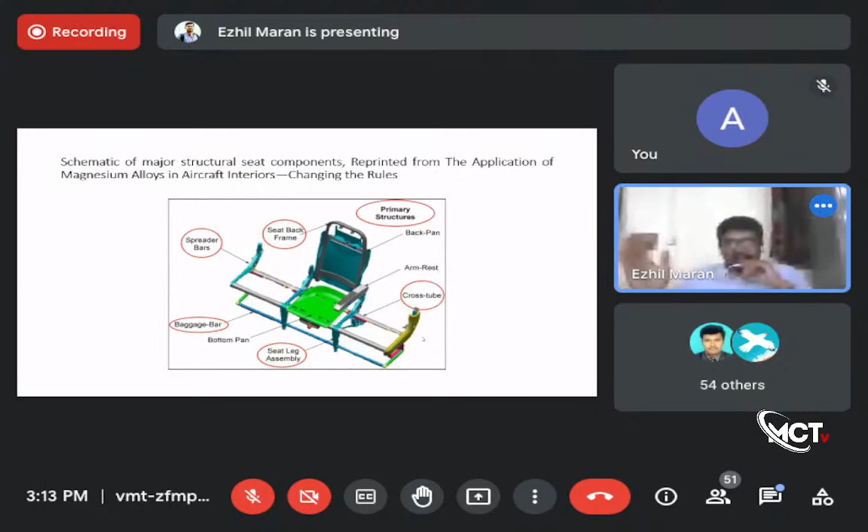So what is the problem with magnesium? First of all, it is highly reactive, and catches fire very easily in powdery form. And second thing is, processing magnesium is difficult even for conventional manufacturers. It is not easy to make a product by using magnesium. You need an argon ambience to prevent atmospheric oxygen entering inside the furnace.

And one more thing, you have to carefully control the temperatures to make a magnesium product. So melting, pouring, etc. is not an easy process for magnesium. It needs a lot of study to make a magnesium product conventionally. That's the problem with magnesium. Then, if you look at additive manufacturing, the same issues will be there.

Okay, but magnesium is a lightweight material. We have to use it for certain applications. So many manufacturers try to eliminate the issue. So what they did was, during the making of the powder itself, they allow a minimal amount of oxygen content inside the atomization process chamber. So magnesium oxide is difficult to melt. The magnesium oxide will not react that easily.

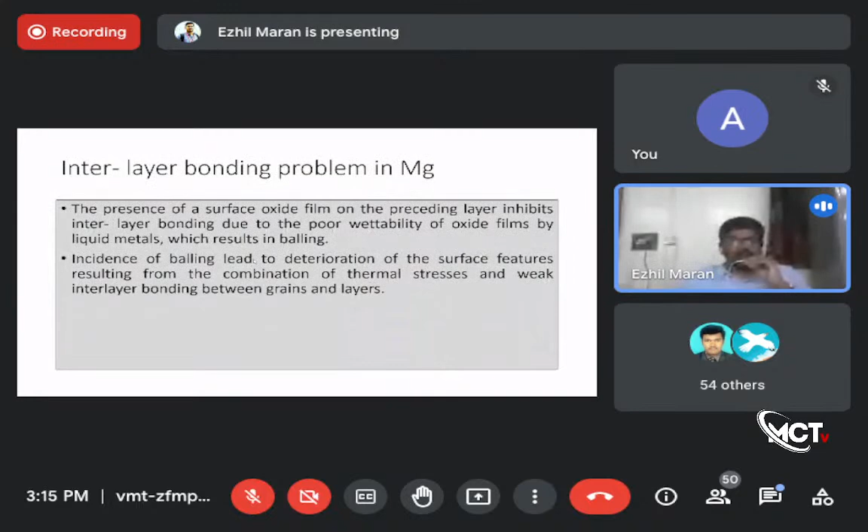So an interlayer bonding problem is there with magnesium. Porosity problems will also occur. With respect to laser parameters, porosity problems will occur. With respect to scanning speed, porosity problems occur. Cracks will occur in magnesium.

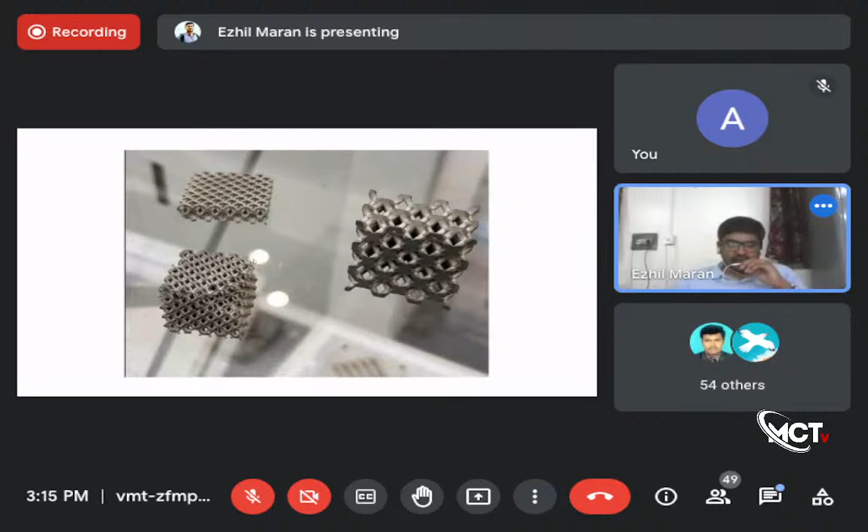So the same is the case with many different metals, not only magnesium, and refractory materials such as tungsten. Nickel, there are a lot of problems. Titanium, there are a lot of issues. So you have to look at various papers to know technically what the issues are. Due to shortage of time, I restrict the slides regarding the technical issues.

Some 10 slides only. In the future of additive manufacturing there is a lot of scope: functionally graded materials, different grades of materials printed at different layers, high entropy alloys, bioprinting, stents, and this picture.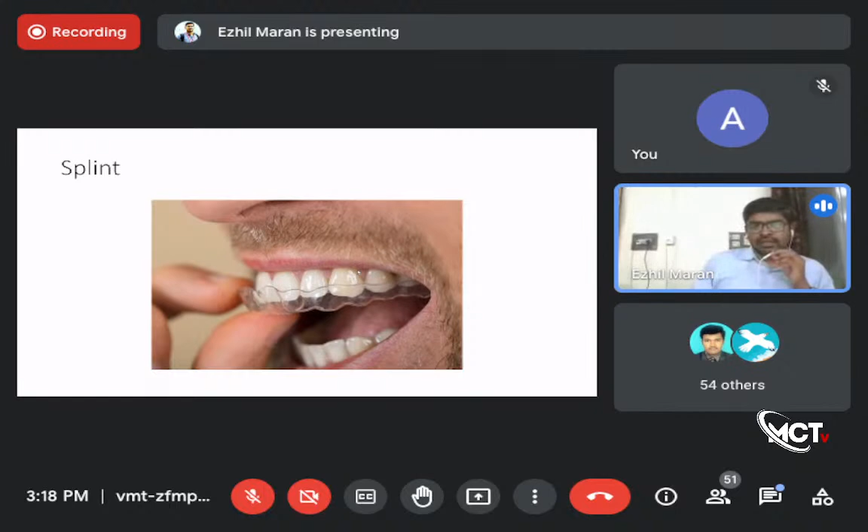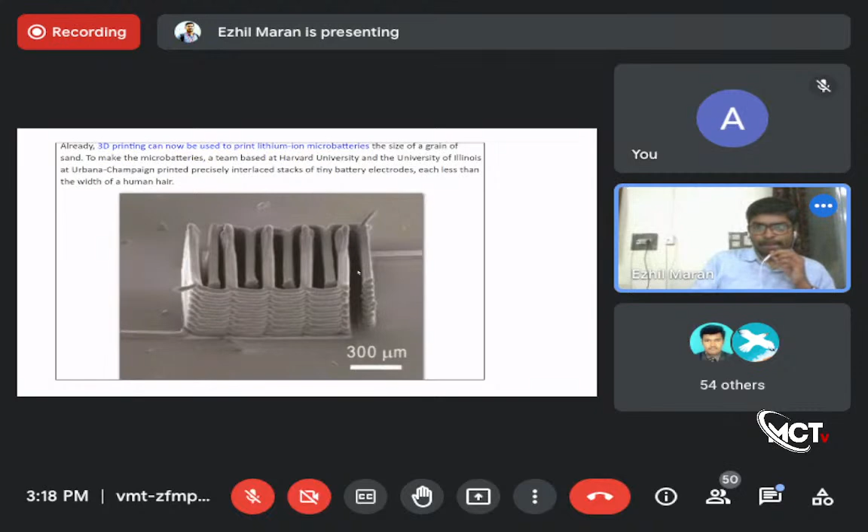Similarly, there are a lot of applications. This particular application, a splint, is for plastic, not for metal additive manufacturing. So nano printing is also a growing field: making small size products, micro products by using 3D printing. So these are micro lithium ion batteries printed by using 3D printing. The University of Illinois has done that.

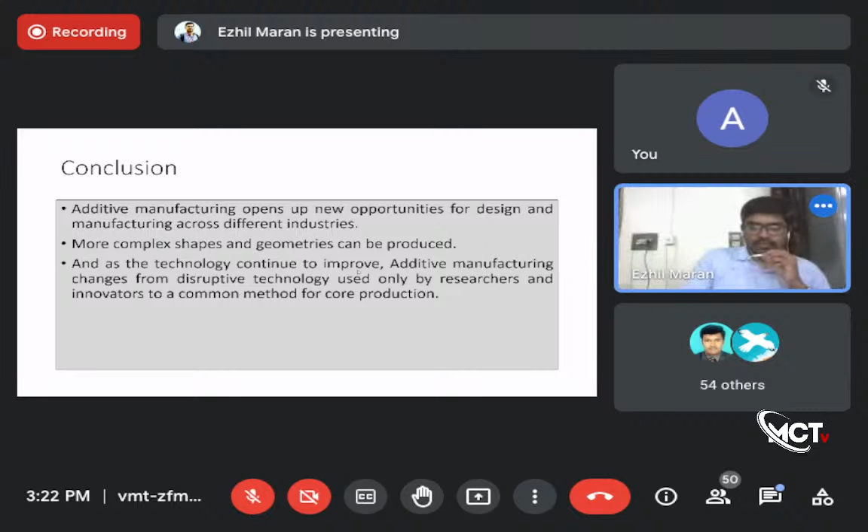But additive manufacturing still has a long way to go. So standardization should be developed. So that is the final summary. It's not a conclusion, it is a summary. Thanks. So if you have any queries, you can ask.

Sir, can I ask? Yes, ma'am. You said that rocket engines are made by 3D printing. Which material is used for 3D printing of rocket engines? Either iron or aluminum alloy? How effective are they? Yes. So rocket engines are generally made of Inconel, a nickel based alloy, because nickel withstands high temperature. It can retain its fatigue properties, corrosion resistance, etc. up to 1200 degrees Celsius. Inconel is generally preferred even for gas turbine blades or engine material.

Okay, thank you, sir. Sir, I have a query. Yes. Sir, you said that additive manufacturing of nickel and titanium is somewhat difficult. What is the reason for that? Reactivity. Titanium is reactive to oxygen. Titanium oxide is formed. So you need a closed atmosphere. At least you need a vacuum ambience or an ambience which contains argon gas. So that makes the process expensive.